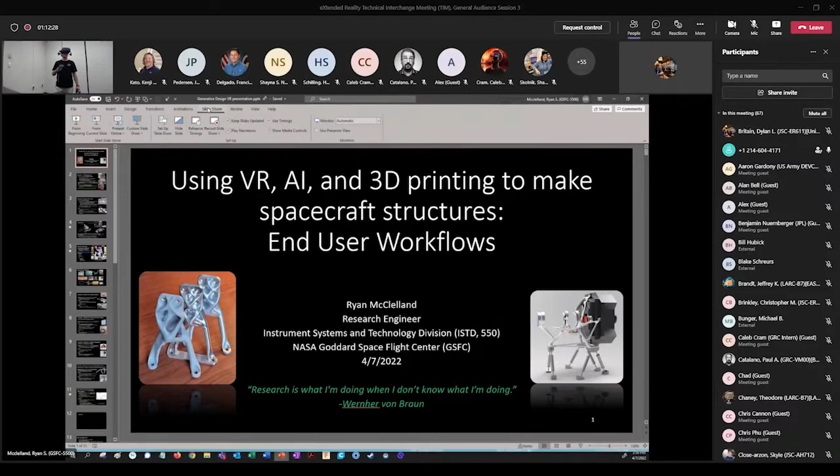Okay, so I'm going to start out with the presentation, just for some intro stuff, and then hop into VR so I don't have to go back and forth. I'm just in the Steam desktop here.

So I'm going to talk about VR, AI, and 3D printing, three exciting new technologies, and how I'm using those to make spacecraft structures. This is going to be maybe a bit of a different talk. This is more of an end user workflow. I'm a mechanical engineer, a research engineer is my title, and I'm just going to show how I'm using VR in my sort of day-to-day work.

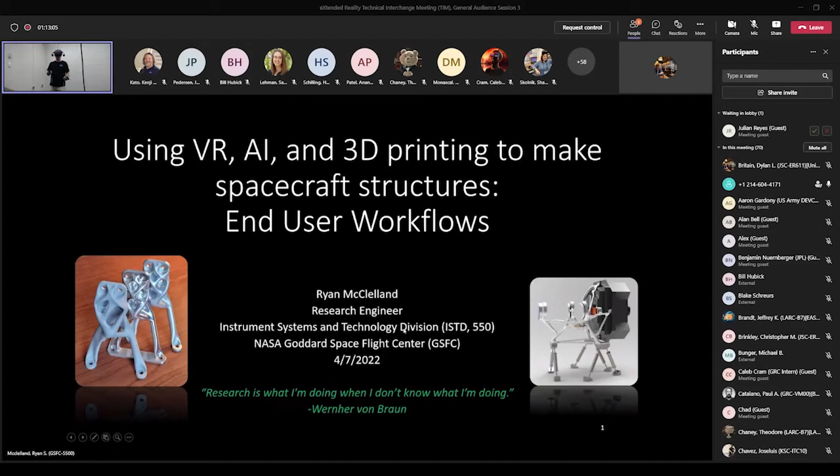So I'm in the Instrument Systems Technology Division here at Goddard, and research is what I'm doing when I don't know what I'm doing. Okay, so for context, my background: I'm a mechanical engineer, a mechanical systems person.

I've been doing design and analysis for the last 20 years. I've worked on all kinds of familiar stuff - Hubble, ISS, the pistol grip tool for folks that know crew aids. And I've never really been satisfied with the cost and quality of computer-aided design and engineering tools.

It's sort of my theory that there's a direct relationship between the programming skills in a profession and the quality and cost of the tool. Programmers can all program, so you get Python, which is awesome and cheap. Very few mechanical engineers could program, at least when I got out of school, so our tools tend to cost $10,000 a year and be of poor quality. I'm hoping to see that slowly shift over time.

I've been fascinated by virtual worlds since the Wolfenstein era, Wolfenstein 3D way back when. I've been a VR enthusiast since before even the Oculus DK1 came out. Here's sort of my 'how it started, how it's going' meme - here's me in the DK1, and I think Shayna, the previous presenter, trying this DK1 was her first VR experience. Then on the right, here I am fully body tracked in my VR chat avatar. That avatar is actually in the credits of a film at Sundance Film Festival. If folks are interested in that, they can ask me more.

So I've been trying to apply VR and AI to my subject matter expertise, which is mechanical systems. I've been trying to infuse VR into my current projects where it makes sense. I have an IRAD for generative design and digital manufacturing, which is using AI and robots to build structures. Generative design is AI coming up with designs, doing the analysis and optimization, and digital manufacturing is robots directly fabricating from the 3D data.

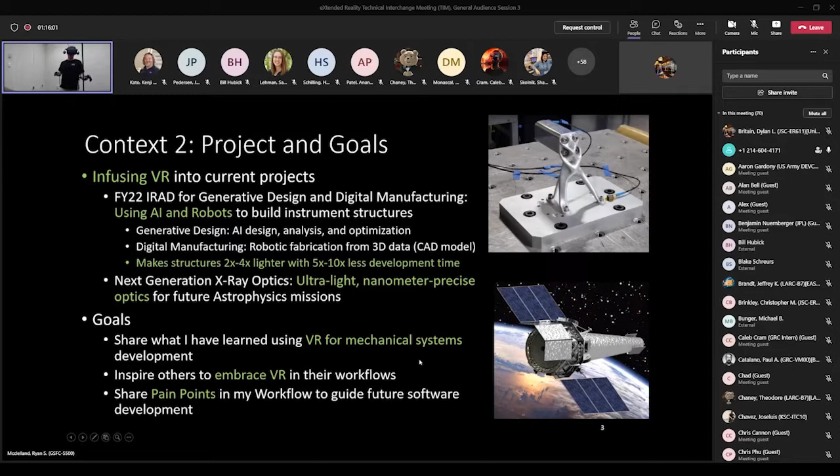My other work is making ultralight nanometer precise optics for future X-ray astrophysics missions, and this is one such mission. The goals of this presentation: I want to share what I've learned about using VR for mechanical systems, and maybe you'll tell your mechanical systems friends, and inspire other folks to embrace VR in their actual workflows, and to share my pain points to guide future software development.

My inspiration for the generative design work really comes from science fiction. Through the pandemic, I've been watching a lot of The Expanse, and you see all these huge space stations. But I know how the sausage is made, and it's a little disappointing to see that we're just not going to get there the way we develop things now. If you take the cost of most of our missions and divide by the mass, you end up with something like $250,000 a kilogram. So I think we just need to get to a lot lower cost.

And there are a lot of applications - visual art, music, architecture, and I'm talking about structural design. DALL-E 2.0 was just released yesterday, I saw in my Twitter feed.

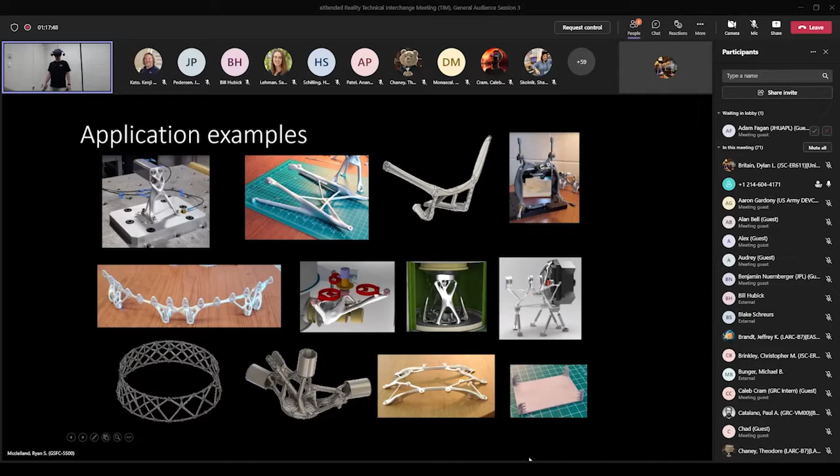Okay, so now I'm going to make an attempt to jump into VR and show you how I'm doing this in my actual workflows. Okay, can folks see VR now? Yep, and I will try not to make people too dizzy by bobbing around.

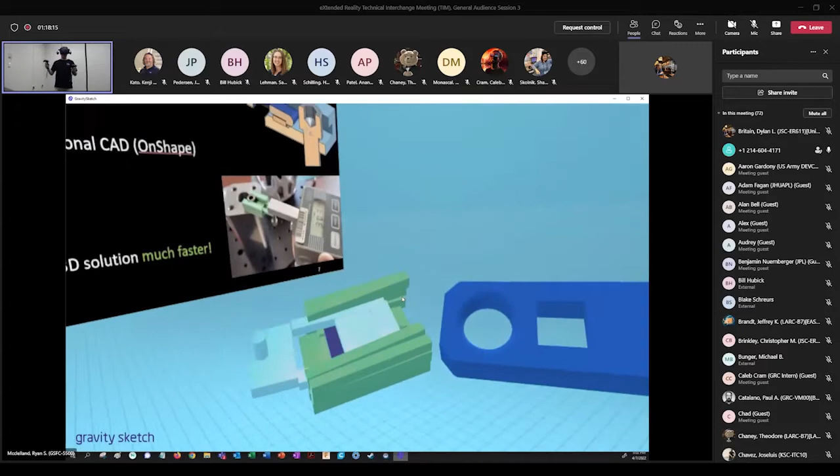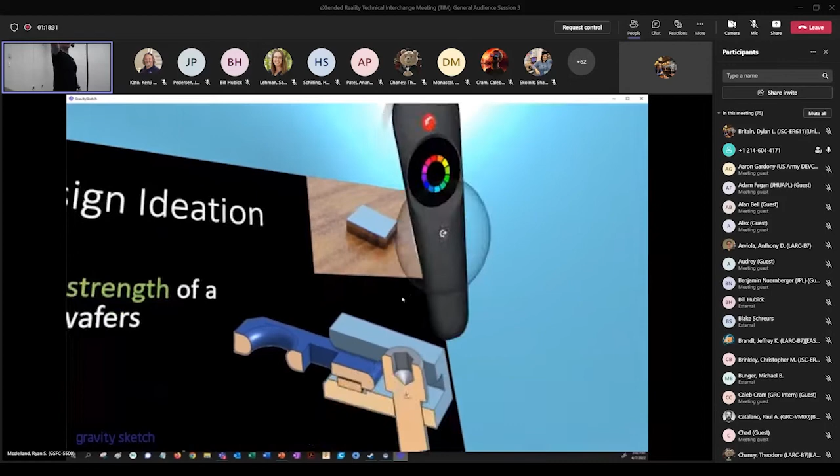So here's an application I had recently. There's this silicon wafer that was bonded using laser welding, and it's a really interesting application. I wanted to see how strong is this little wafer. So it's kind of a simple thing, but maybe would take people a little bit of time.

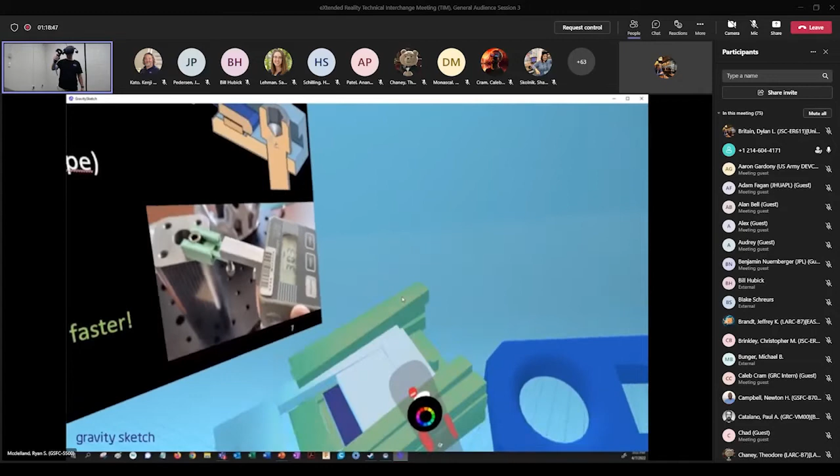So I hopped into Gravity Sketch and I sort of used 3D thinking to think about this design and how I would make a fixture that did this really, really cleverly and quickly. So I did this rough sketch in Gravity Sketch, and then I went to my 2D CAD tool, or screen-based CAD tool rather, and made this design.

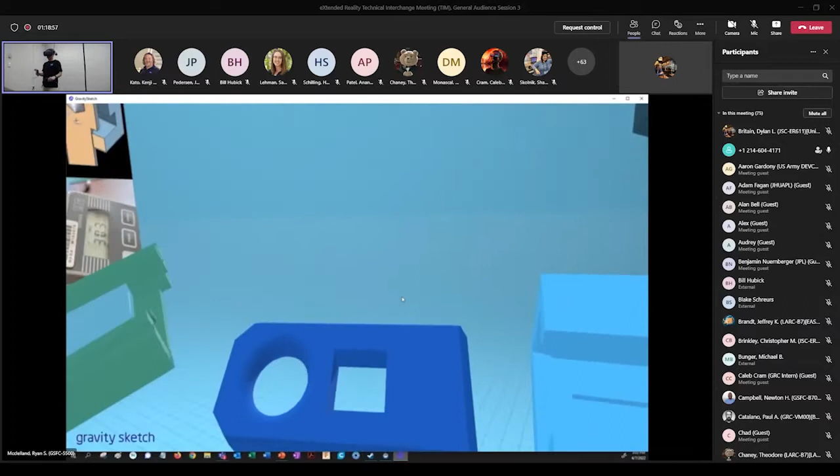So I don't think I would have come up with this clever mechanism that I'm about to show you if I hadn't done it in VR. So you have this little thing which is kind of like a slide, and this piece slides into it, fits in there. And then it leaves a little gap where I can put the sample in.

So I can drop the sample right in. And then when I slide this over, there's a little catch on the back that applies the load. And then I put this bolt in, and then I can do this pull test. I can just pull on this and find the strength of that bond.

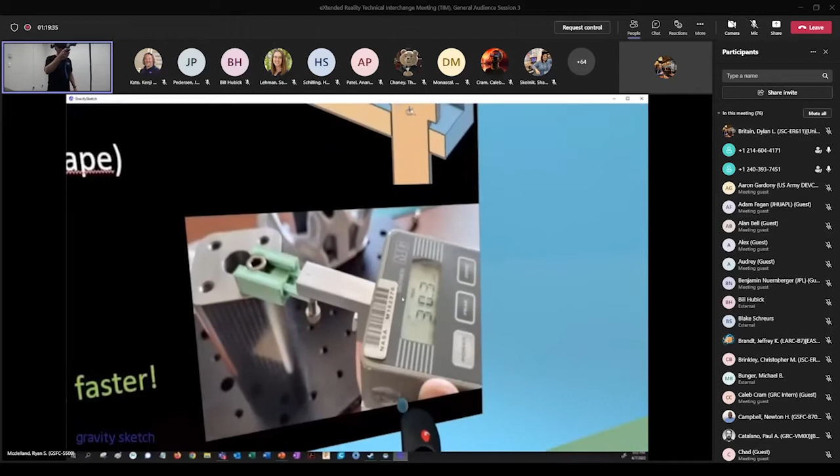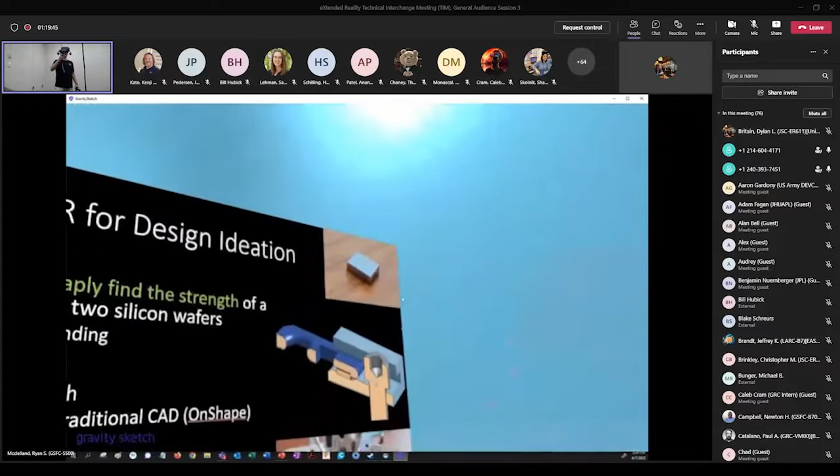So here is an image of what that test actually looks like. It supported 30 pounds, that little tiny bond. And what's interesting about this to me is that I was able to go from having this problem to doing this test in one day using VR and additive manufacturing or 3D printing.

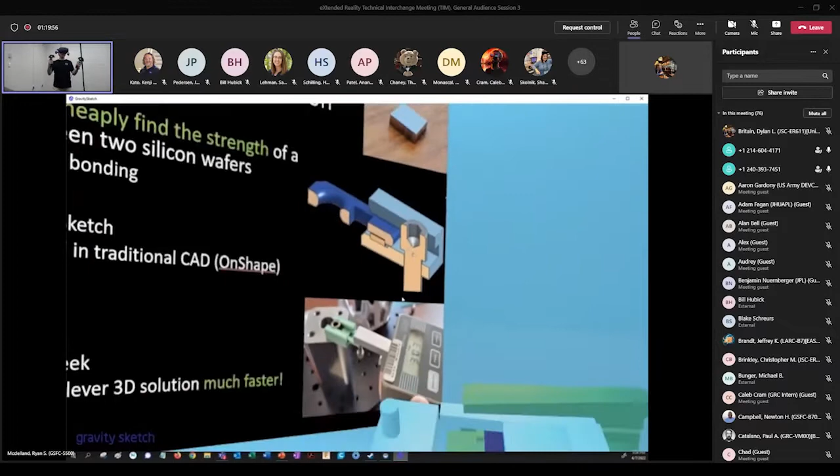So I think if you were to just give this to someone who was using traditional tools and ask them, can you find the strength of this? They would probably tell you, come back to me in a week or two.

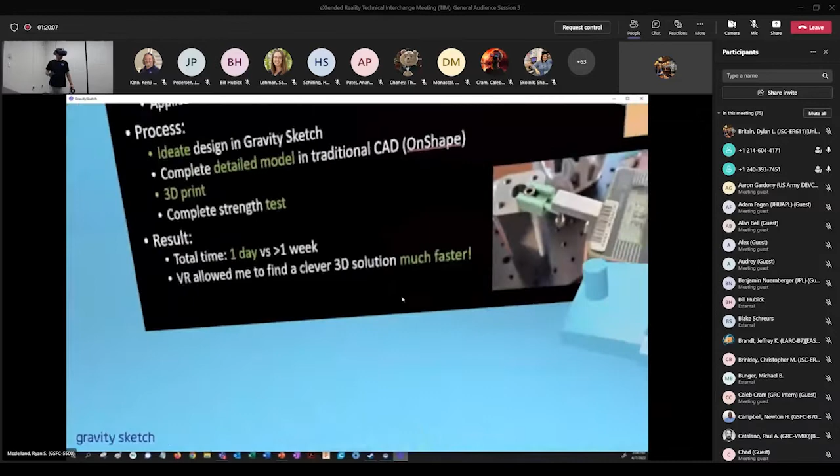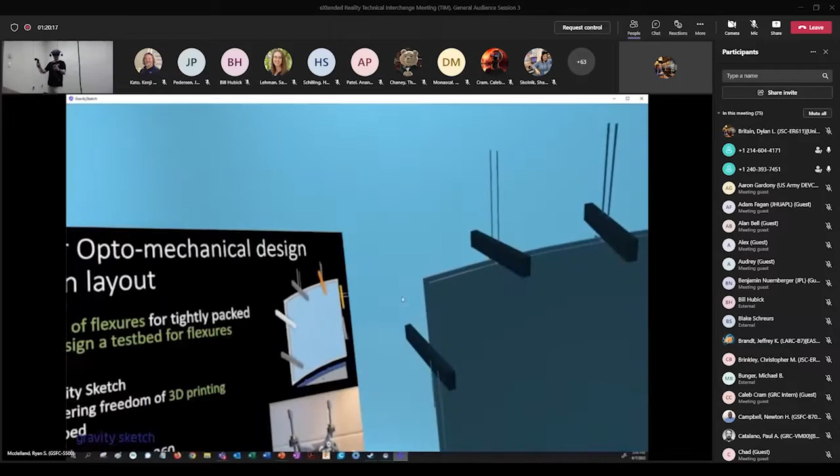So any questions about that application before I move on? Doesn't sound like it. Okay, so here's another application. Yeah, I'm kind of blind to Teams at the moment.

Here's another application where I have these X-ray mirrors, and I brought them in from a CAD system, and I need to develop a novel flexure mount for these mirrors.

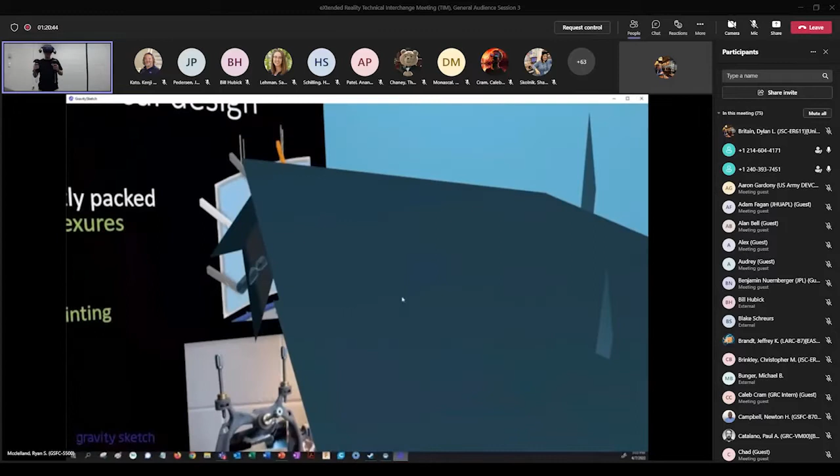So I bring them into VR, and I can really easily and quickly sketch complicated things like these little tiny flexures that you're probably seeing on your screen now. I can zoom in and model these really tiny things.

I can make myself like the size of an ant, and I can make these kind of extremely detailed structures, and then I can zoom back out and continue working.

So what I was able to do with this is come up with a novel arrangement of flexures for these optics. And I realized when I was demoing this to a friend that I know how big things are to me, but since you are looking at this on a screen, I had to include the banana for scale.

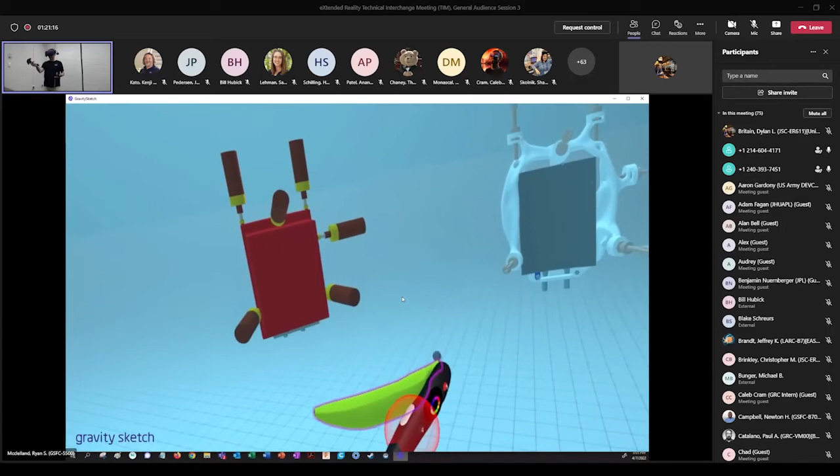So this is where the generative AI part comes in. So in VR, I kind of mapped out a test bed. Basically, I want a test bed where I can try this out quickly.

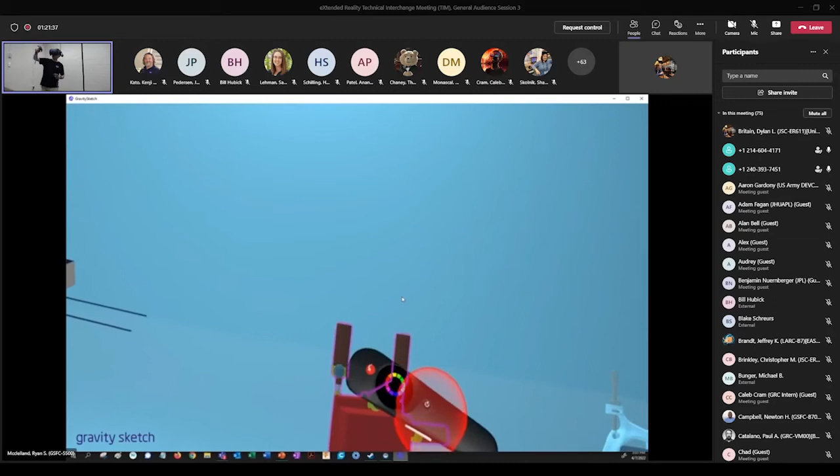I mapped out the areas that I can have material in my design, which are represented by green - those are areas where I need to have material. And then represented by red are areas where I can't have material in my design. So this is all I give to the AI, basically where you can have material and where you don't have material. And then this is what it came up with.

So you can see that it came up with this sort of beautiful organic design very, very quickly. So in this case, I mostly just used it for speed. So you can see when I line these up, how it basically took my constraints and then designed something from it.

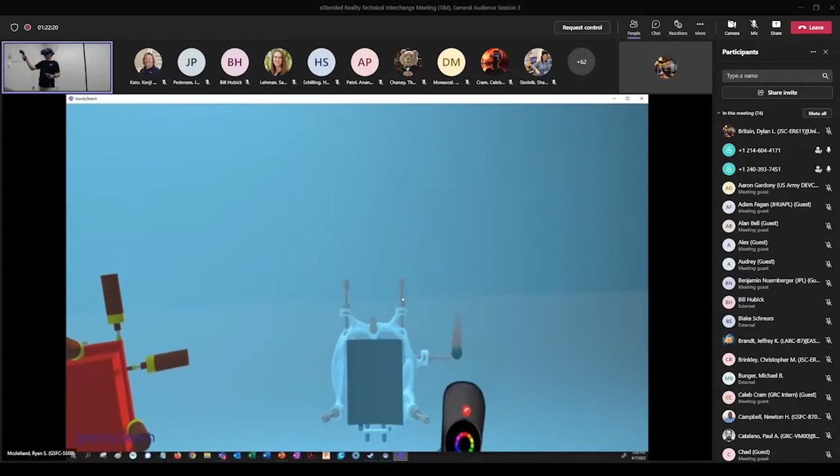I used VR to sort of lay out how this was going to be designed. So yeah, this is another case where what's interesting is I was able to come up with this novel arrangement by really thinking in 3 dimensions.

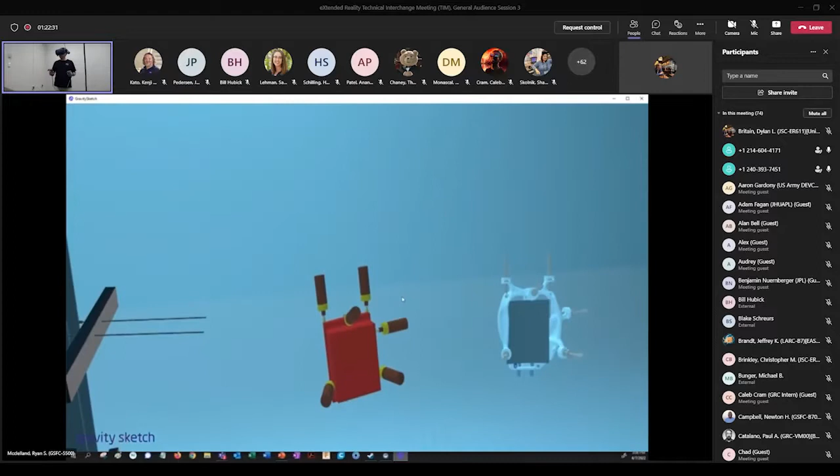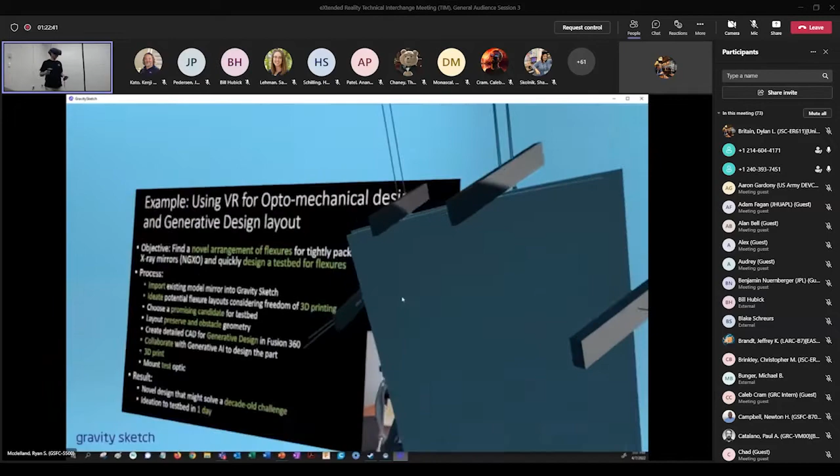Okay, so a third example is this optical bench. I'm going to change the lighting a little bit here.

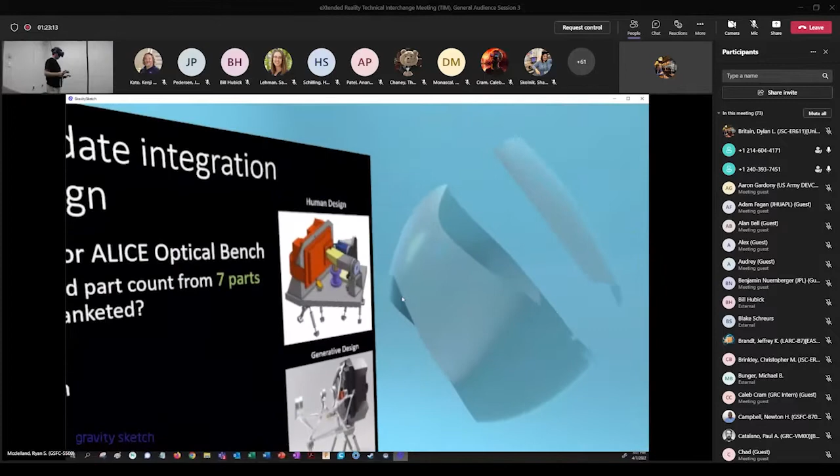So Ryan, for that last one, how many different designs did the system come up with that you had to choose from? On the order of a dozen or so. It depends on what you input. You can input, show me one that's additive manufacturing, show me one that's different material. You can have different generative algorithms running. So it's up to the user, but on the order of, say, for a problem like this, a half dozen to a dozen.

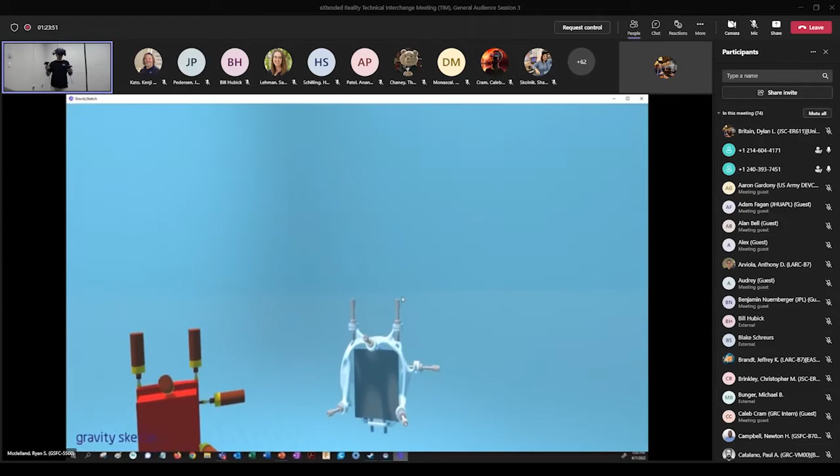So there's really a human in the loop required for this. When you work with most AIs, it's kind of like collaborating with someone that can be very brilliant or very thick. So you really have to tweak your inputs. Yes.

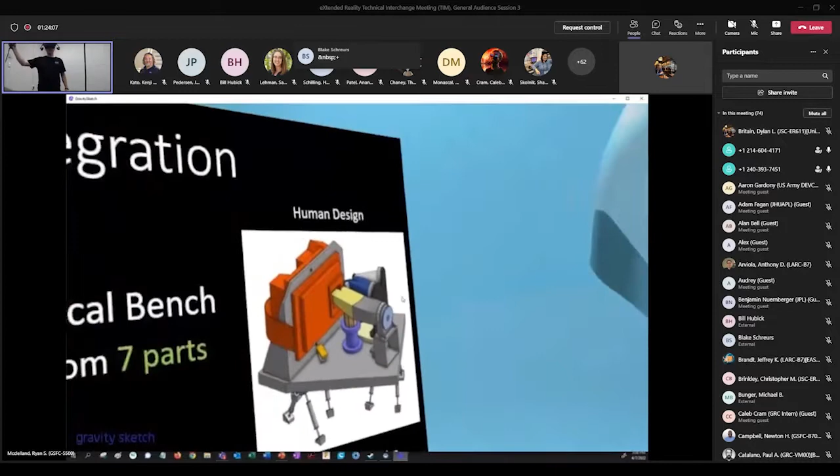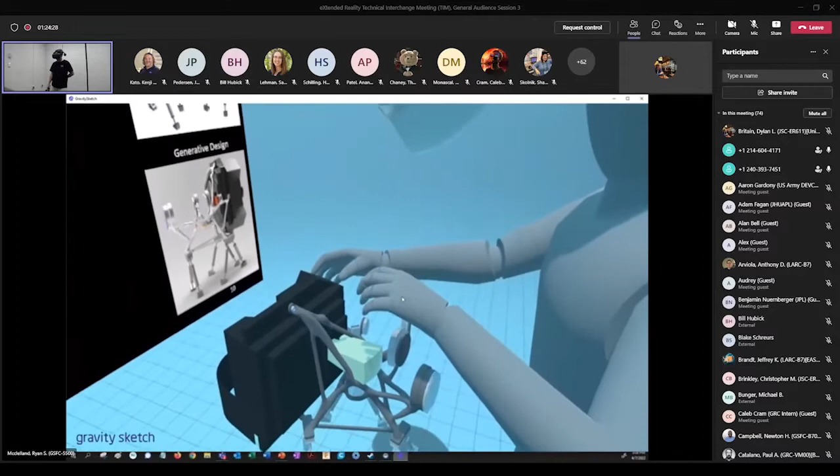So for this application, the human design was this very standard looking, boxy, blocky optical bench. And then I ran it through my generative design and came up with what you see here. This is one sixth of the mass of the original design, and it is also stiffer, and it combines 7 parts into 1 part. So for someone who wants to save weight, it's very, very convincing.

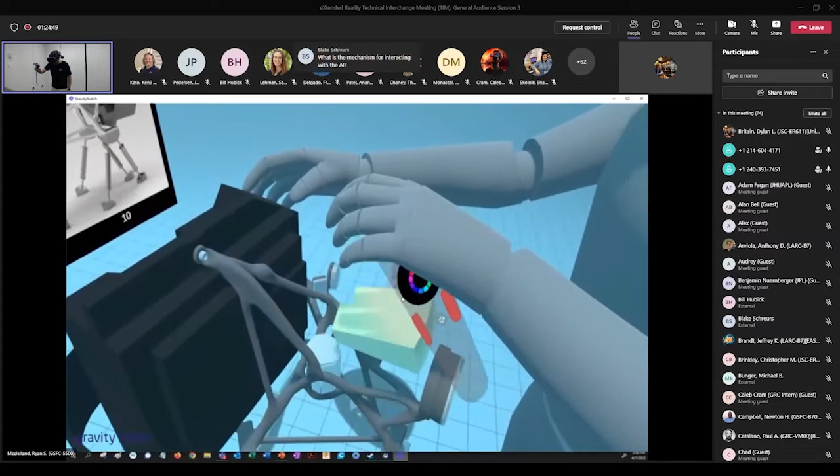So what I brought this into VR for is first to see it's way smaller than I thought it was. I really get a sense of scale that you can get by seeing this mannequin here. And then I also realized that I did not leave anywhere near enough room to get this lens element in. So I've got to leave some more clearance there.

If I look here, I also didn't leave enough clearance. And then these little flexures are supposed to get adhesive bonded, and they're just too small. That's the design that someone comes up with when they don't realize that this thing is actually tiny.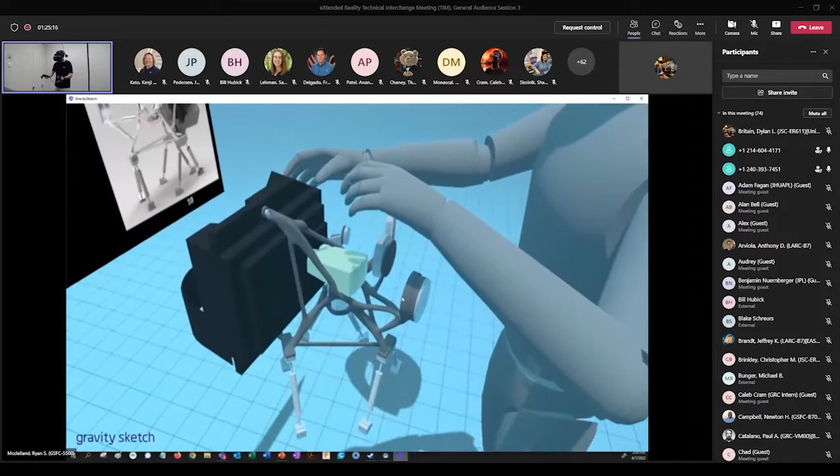So again, I was able to come in here and do a quick check of this very novel design that people see and get concerned about because it looks kind of alien. So I can bring them in here and show them, oh, well, you can integrate it. And then they can point out issues, and I can go back in and rerun the generative design with new parameters.

And another kind of fun application is also, how do you blanket something like this? So I can think about how you might put an MLI blanket around this just really super fast. So there you go.

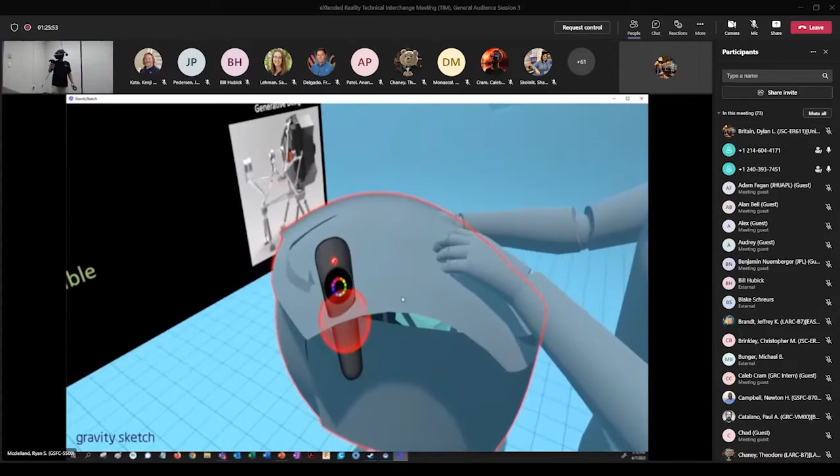Okay, any questions about this one?

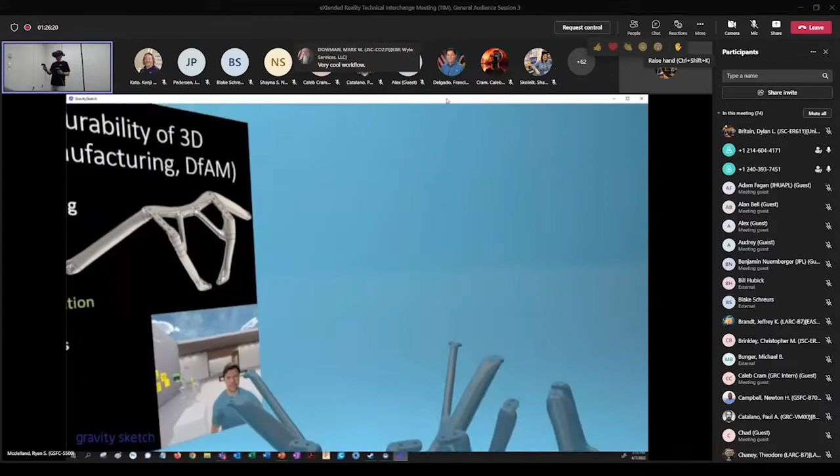So how do you get your constraints over to the AI and have the AI iterate over it? What does that interface look like? So it's basically, I'm using a program called Autodesk Fusion 360. I can take, if I'm in VR, or if I'm just thinking about it, what the constraints are, like I showed with the red and green part over here, and that is put into Autodesk Fusion 360, which is what generates the model.

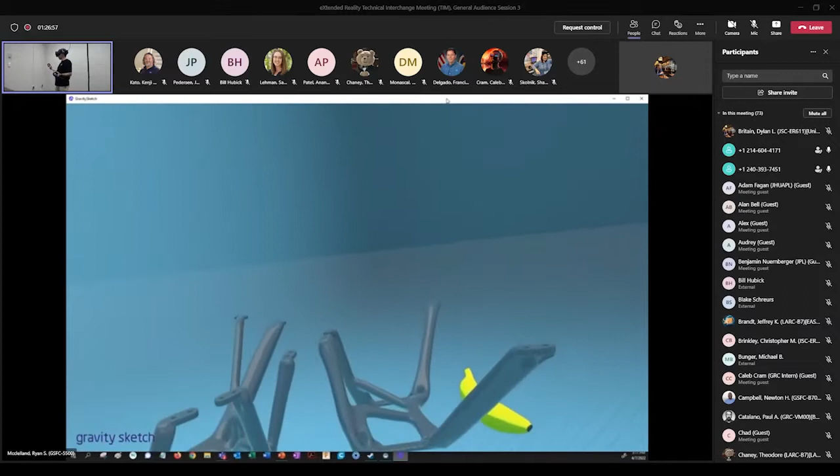Okay, so a final application here is something I heard lots of other folks touch on, which is collaborating. So this is a fairly large titanium piece in terms of structures. It's additively manufactured, and it's actually just got finished printing. With this part, I went and collaborated with an expert at Penn State, Tim Simpson, who runs their CIMP-3D lab, and we were able to hop into spatial.io together.

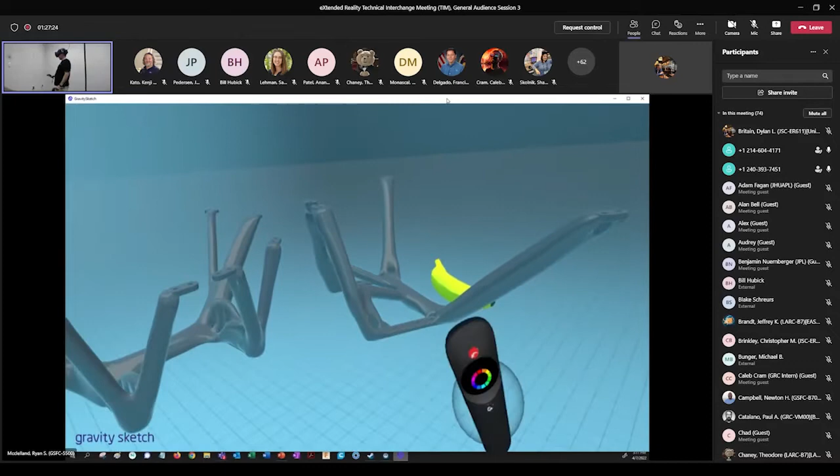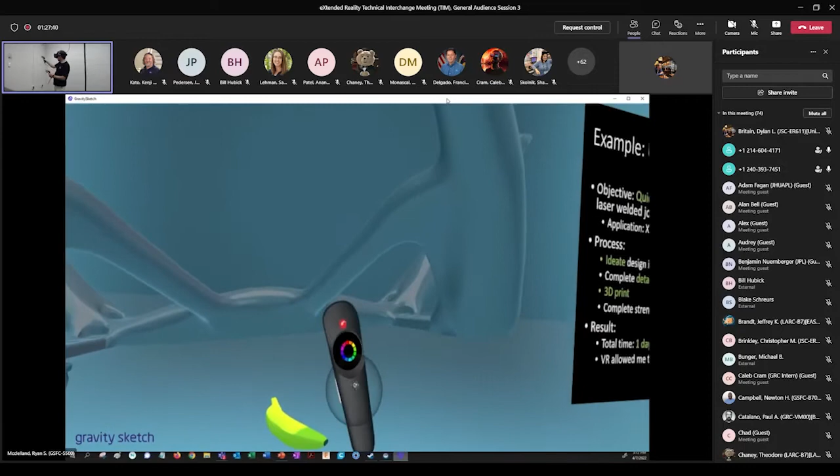This is just a research part, and we looked at this part together. Being able to bring an outside expert in to look at this, he could look at it and think of all the different orientations you could print it in, and see, okay, we've got some overhang angles here. We're probably going to need support material where these bolts are. Maybe you can grow the material around that bolt a little bit, so we don't need as many supports. And in fact, this was an earlier design that we decided to simplify for additive into this design.

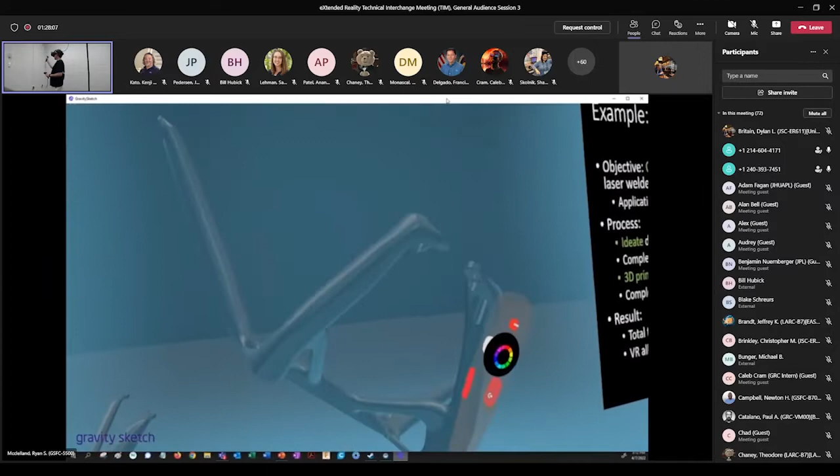So it really just allows you to quickly hop in, and more so than you can do on a screen, really get an idea. You just see things in VR, as you all know, that you just don't see on a monitor.

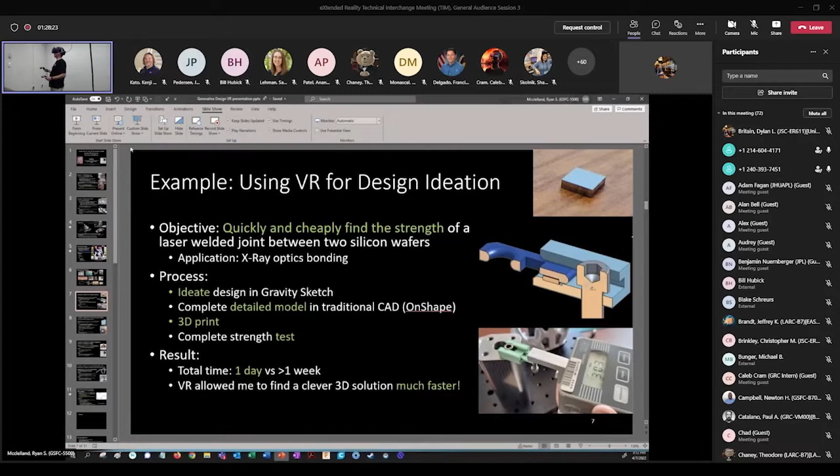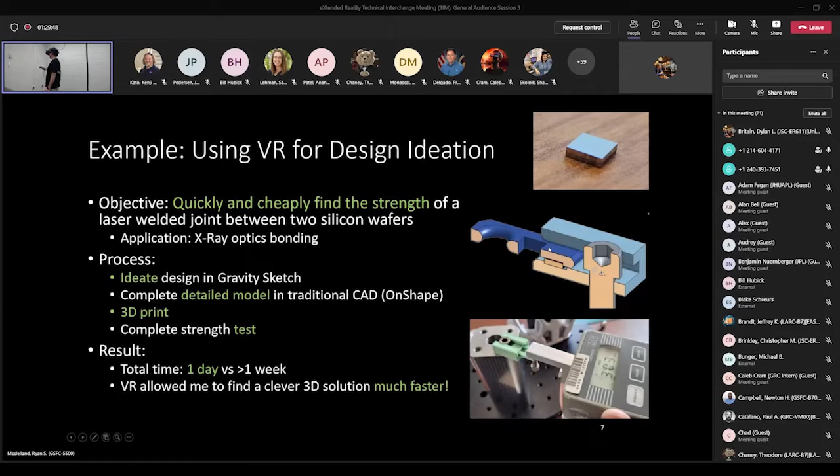The pain points right now: there really doesn't exist an option to do detailed parametric CAD design in VR. Like this design you see on this slide, there's just nothing to do that in VR right now. Maybe there are reasons for that, but I don't think anyone's even working on it that I know of, and I'd like to know if people know differently.

Integration into CAD tools is really lacking, so there's lots of annoying application switching. Getting into Gravity Sketch isn't too bad - you export an OBJ, and OBJ export from most CAD software is actually really robust. I just make sure I'm under one million vertices or whatever, and away I go. But CAD companies seem to be stuck in this trough of disillusionment mentality.

Okay, that's my last slide, so I can take any questions. I probably went really fast.

That was an excellent presentation, and kudos on the live demo - those are always a challenge. I do have one question: you showed a lot of static parts. Can the system also incorporate moving parts as part of its design criteria?

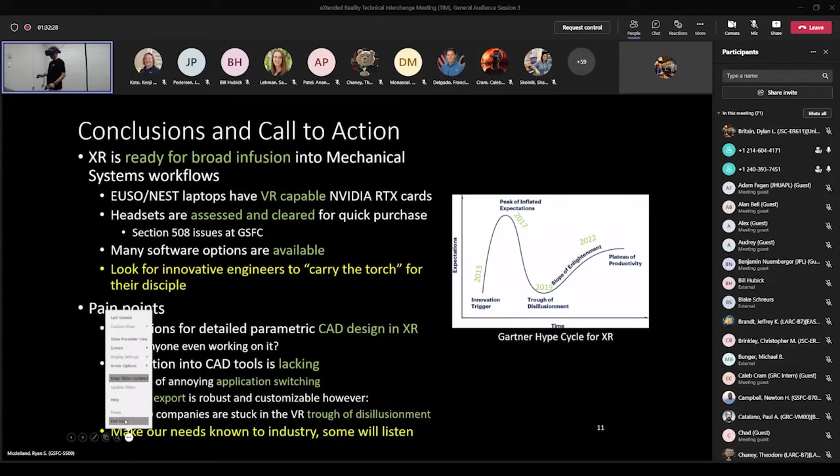No, so there's also the banana method. Here, bananas and avocados - hold on, let me pull my VR back up. Okay, can you see that? Yes. So I've got this teleporting banana. The way this tool is really intended to be used, you're kind of supposed to unlock your...

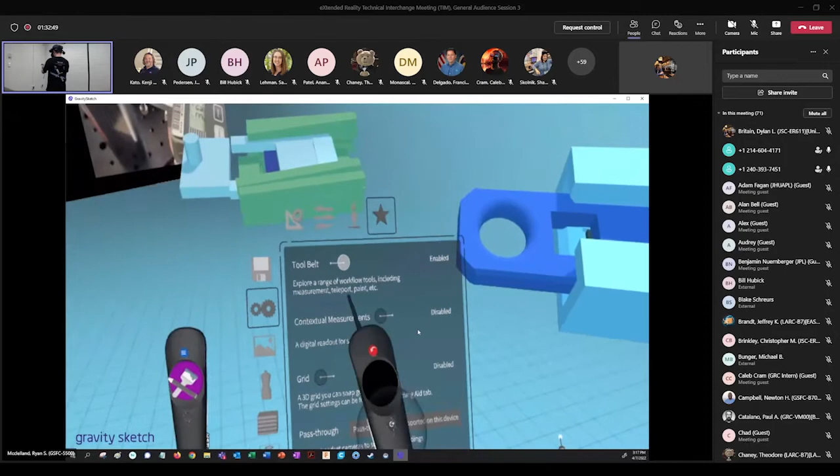You can shrink things really tiny, so now you see everything I'm working on is tiny. Then I can just move myself really quickly that way and move things around, and then scale myself back up to 100% through this nice little haptic snap. So I do keep losing my space in the room, so I'm never quite sure who I'm facing.